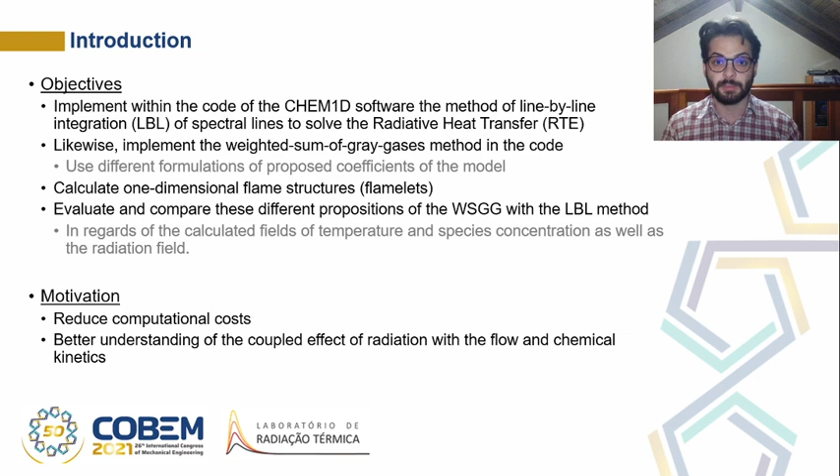So, going a little bit into the equations, for a medium that absorbs and emits radiation, but scattering is neglected, the radiative transfer equation is given on the right. And integrating it over all the spectrum will result in the total absorptance along a uniform path. So, taking for example a single broadened line, this result is null almost everywhere except in a narrow wave number range surrounding this single line.

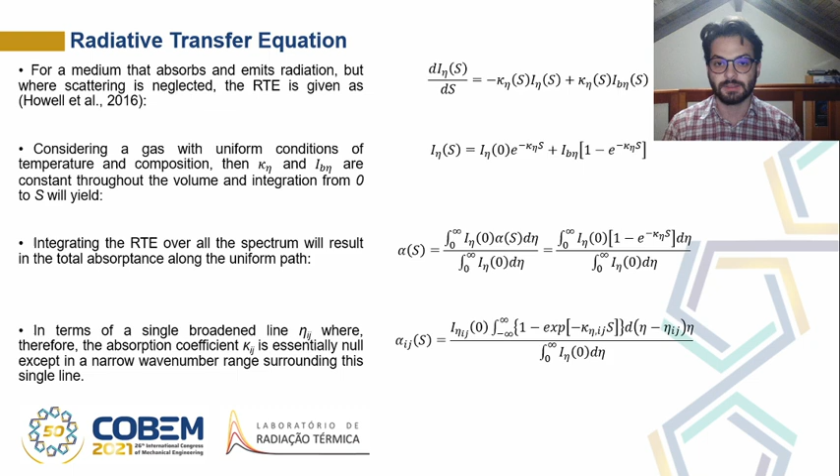The weighted sum of gray gases then represents the spectrum in its entirety with only a few gray gases with uniform pressure absorption coefficient plus a transparent window. And it allows for changes in molar concentration and temperature to be accounted for in the partial pressure term and in a temperature-dependent coefficient. And the determination of these coefficients varies from author to author, with each using the fitting data that best responded to their benchmark comparisons.

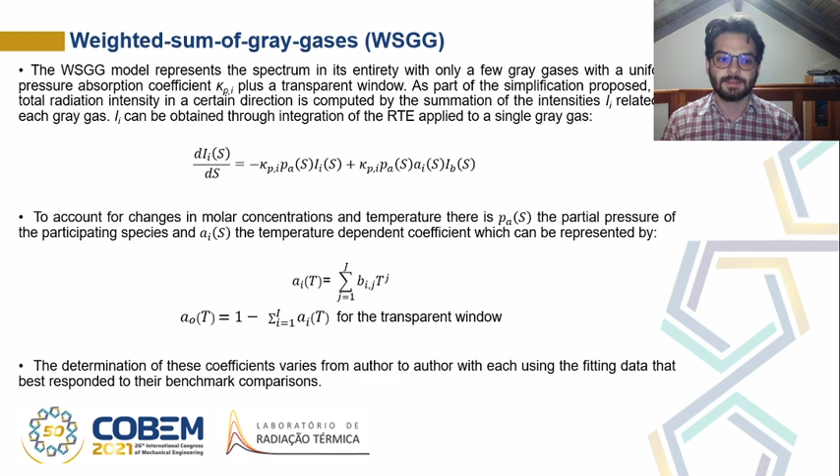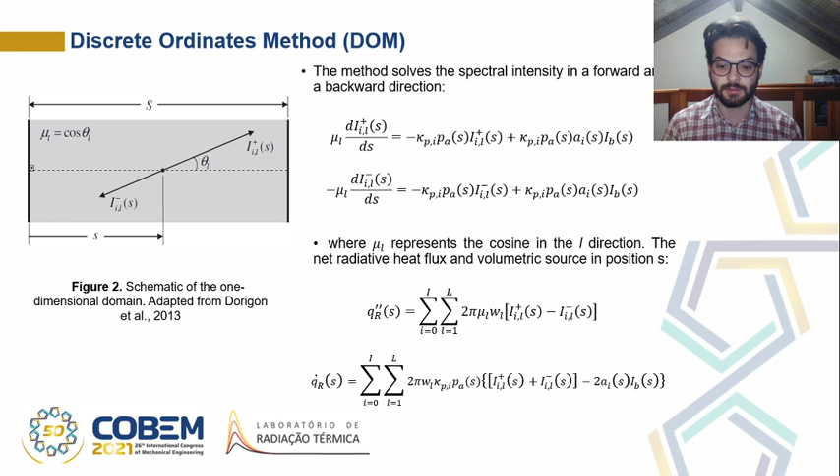So the LBL method stands today as a benchmark solution of spectral dependency. It can be considered exact except for some minor numerical approximations in the integration. This model was based on the discretization of the wave number for the spectral properties, which are available in the extensive database of HITEMP 2010. Also, for solving the radiative transfer equation, the discrete ordinates method was utilized, and this method is intrinsically conservative because it does the balance of the heat flux and the heat source.

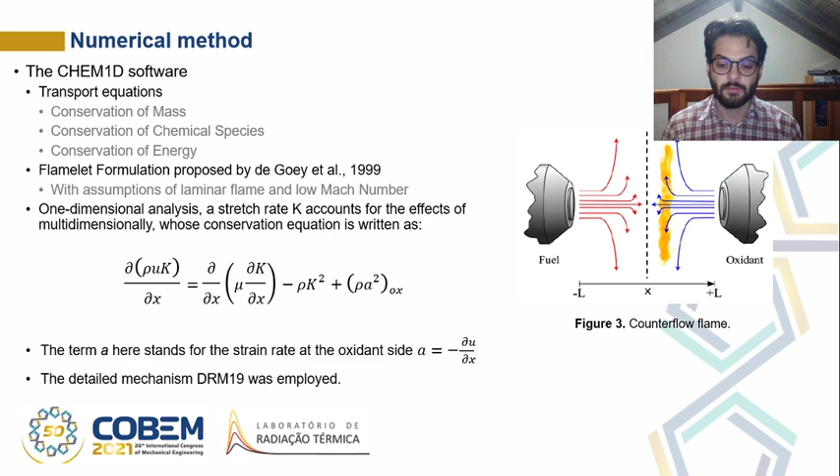So, the numerical method: the Chem1D software has the transport equations. It was based on the flamelet formulation proposed by de Goey, with assumptions of laminar flame and low Mach number. Since it's a 1D analysis, a strain rate K was introduced that accounts for the effects of multidimensionality. And here is the conservation equation, where the term for the strain rate can be observed. This strain rate term was varied along this research for multiple cases.

So a mesh convergence study was done to analyze its independence. Four meshes were used, and it can be seen that from 400 elements to 800, there isn't too much of a change. So we opted to use the 400 mesh to reduce computational costs.

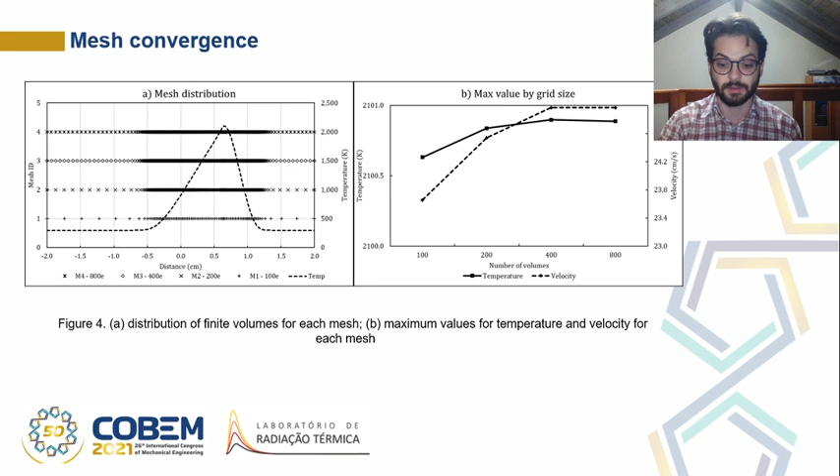Here we can see the benchmark results for different strain rates. With 5 different strain rates of 5, 10, 20, 50, and 100, the case was simulated with the line-by-line integration method. What is interesting to see is that the formation of carbon dioxide is more affected by the change in the velocity gradient than the formation of H2O, the water vapor. There was a decrease of 17% in the peak value of CO2 between the most extreme cases, while for water vapor it was only 3.4%, and the temperature reached a peak at a strain rate of 20.

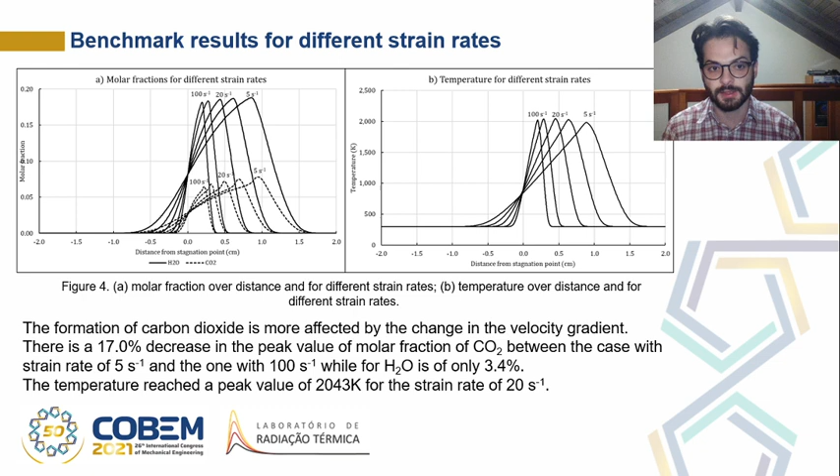So it was very interesting to see these results because changing the quantity of water vapor and carbon dioxide directly affects the radiative heat flux and heat source, as can be seen next. Here are the results for the radiative heat flux for these different strain rates, as well as for the radiative heat source. Interestingly enough, there isn't much change in the maximum value in absolute terms for the heat source, much like the temperature, whose peak doesn't change that much. However, for the heat flux, there is a great difference in the profile.

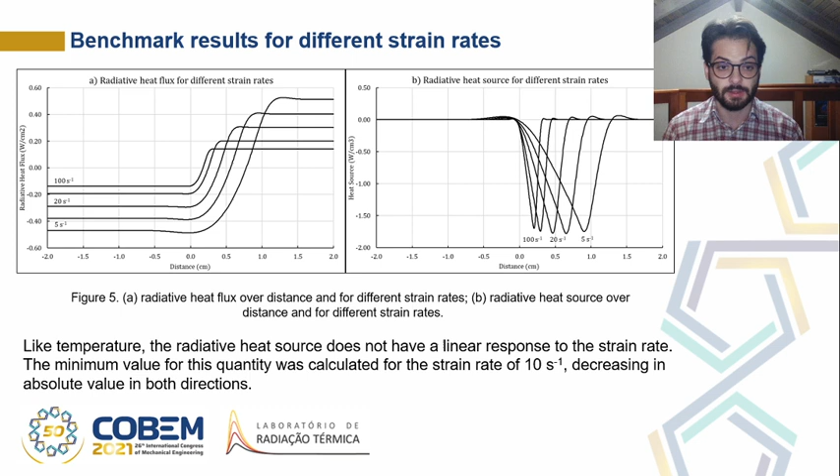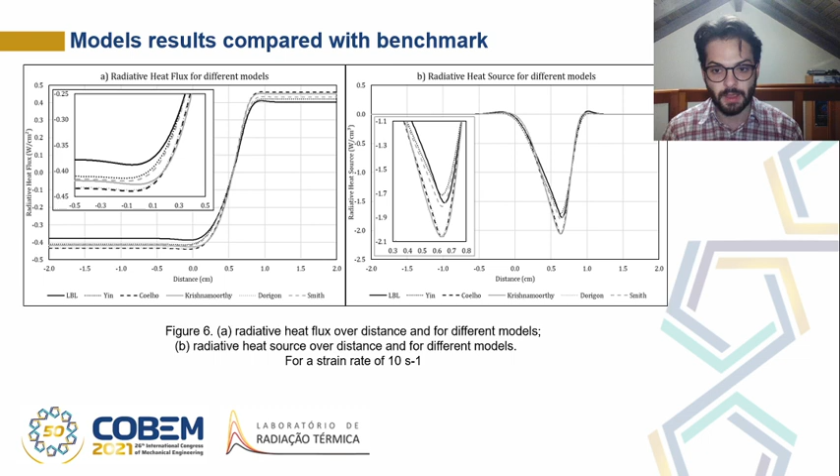So now we are comparing the different propositions of the WSGG with the benchmark result. In this work, 5 different propositions of the WSGG were applied, which can be seen in these graphs. Interestingly enough, principally in the radiative heat source, two have a closer result to the benchmark: the Smith proposition and the Yin proposition. They closely resemble the profile of the LBL. It is quite interesting, especially because these two methods did not benchmark their results with the LBL, while, for example, Dorigon's case was benchmarked with LBL.

Here we can see the results in a table with the maximum and the average normalized errors. We have errors of up to 20% for the Krishnamoorthy coefficients, while for Dorigon, the maximum error of the heat source was 17%, which is quite interesting because his work had previously achieved a relative error of at most 5%, but those were decoupled solutions. Since we are dealing with coupled solutions of an iterative process, a change in the formation of the species and the temperature also leads to a change in the radiative losses.

Another important factor was that all these 5 models were designed for a specific molar ratio of 2 to 1. And as we can see in this graph, the molar ratio is constantly changing. It goes from 3 on the fuel side and abruptly changes to 2 to 1 on the oxidant side. Interestingly enough, the relative error has its highest peak right at the transition, which is also the flame front.

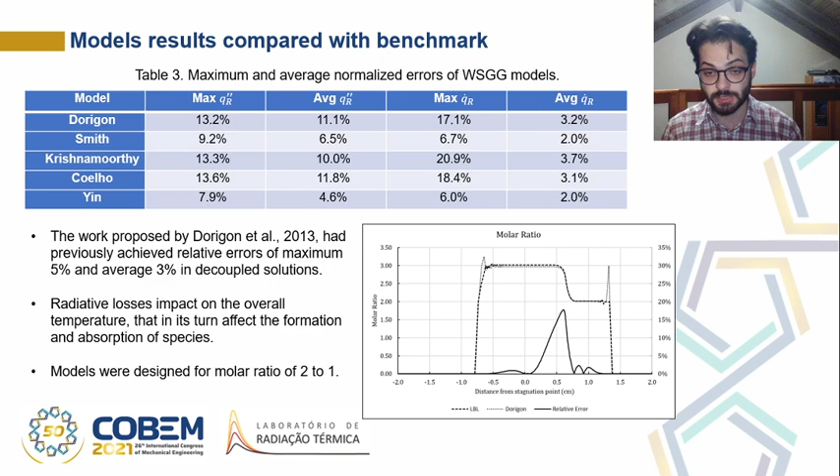So here, since the previous comparison was for one specific strain rate of 10, now we are analyzing all 5 different strain rates. It can be seen that although the models by Smith and Yin have the closer results to the benchmark, neither of these models perfectly follows the behavior of the curve for the radiative heat source in the benchmark result, the one on the left. They have different peaks for the maximum value. None of the other models perfectly follow the behavior either. However, for the radiative heat flux, any of the 5 models can give a good evaluation of the profile.